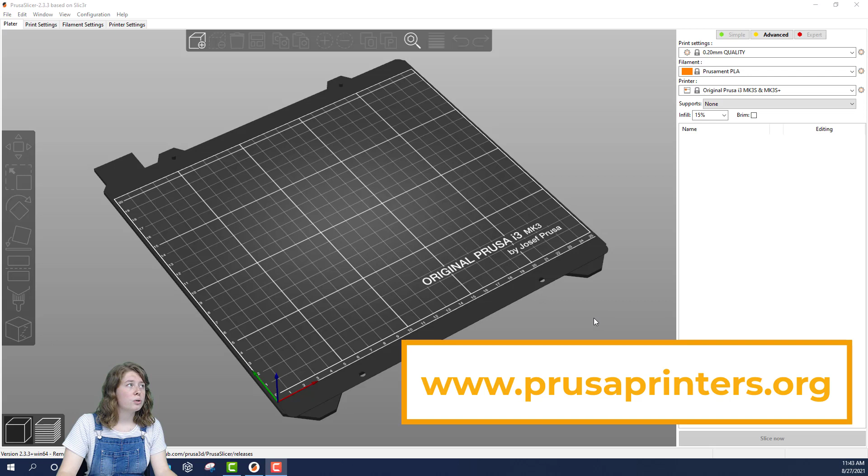If you haven't downloaded the Prusa Slicer yet, you can get it off of their website. It's listed under the tab Prusa Slicers. When you go to download this, we're specifically looking for version 2.3.3.

If you already have the slicer downloaded like we do, I'm going to take you through setting up the new printer. We're going to go over to this printer setting, select this drop-down menu, go to Add/Remove Printers, and then select Add/Remove Presets.

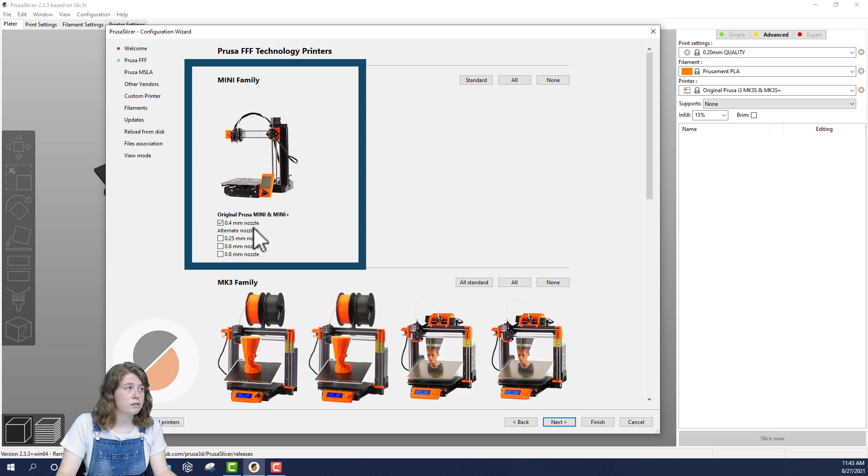From here, we want to make sure that the Mini family is selected, and we are looking for the 0.4mm nozzle. We also want to check and make sure that the original Prusa i3 MK3S is selected, also with the 0.4mm nozzle. From here, we can just hit finish and our printer will be added to the new slicer.

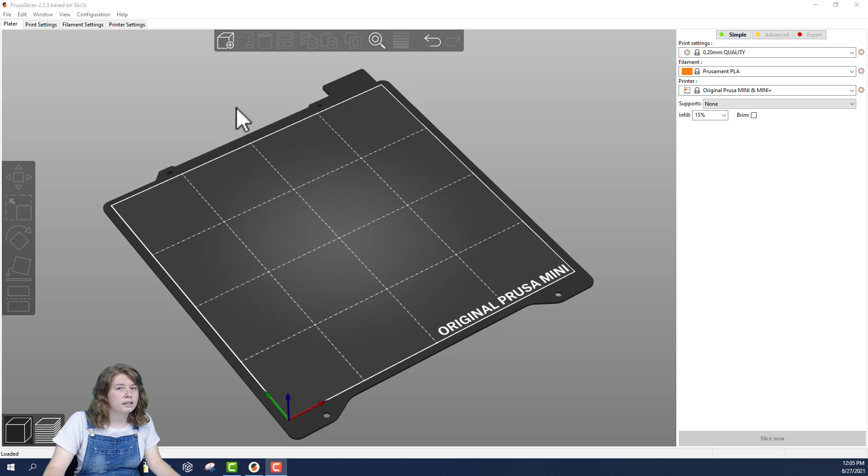Now that we have the original Prusa Mini bed imported into the slicer, we can add our project. To do that, we go up to this 3D square and select it, and you'll see your project come up. You'll select your project and hit open, and there you can see your coin automatically comes into the printer bed.

So now that we have the coin loaded into the bed, we have a lot of options for what we can do in terms of moving the coin around, scaling it, or rotating it. We'll take a look at the rotation first.

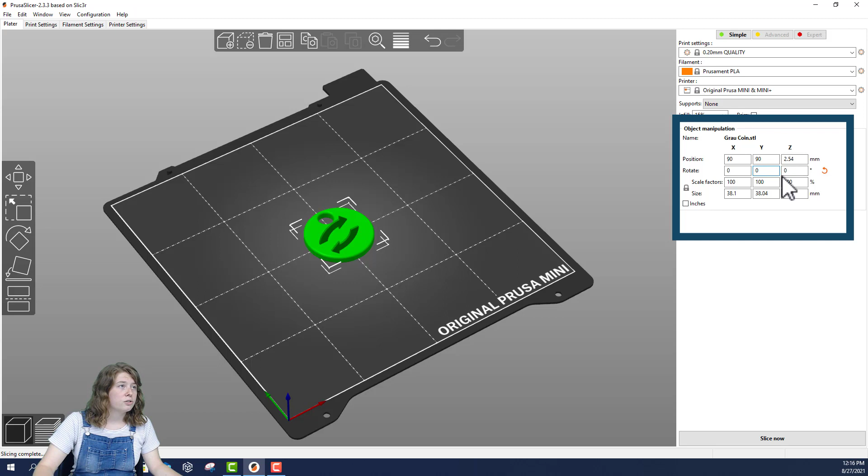If we wanted to rotate the coin, you can use these arrows and rotate it, or I think it's easier to use the settings on the right hand side. Say we wanted to flip it 180 degrees, we can do that, and then flip it back. You can also change it in the Z direction by 180, and then change it back. That's how you use the rotate tool.

We can also change the position of our coin on the bed if we wanted to. Again, we have these arrows highlighted that we can use, or we can change them over here. Say if you wanted to move it along the X axis a little bit, you can do that there, and you can also move it on the Y. Now you typically won't have any reason to move it along the Z because that'll just be up and down, and you want your print to stay on the bed.

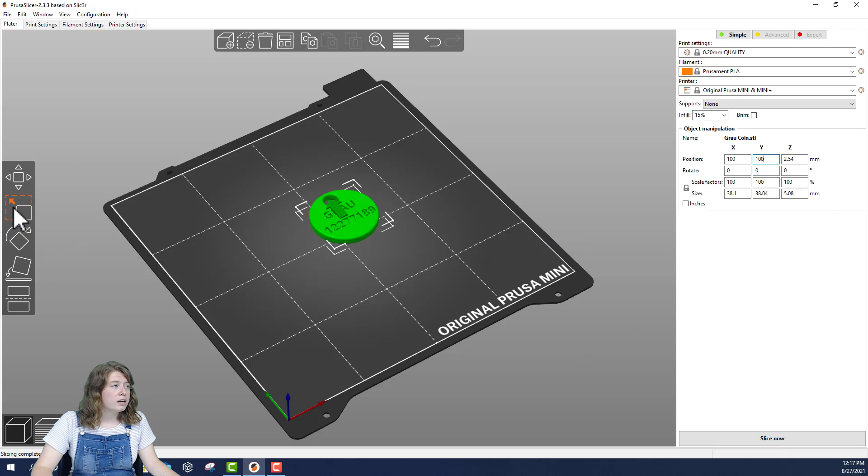Another thing that you can do here is scale your print. Sometimes you might be working in inches or millimeters, and when you bring the print into the bed, it'll look much smaller or bigger than what it's supposed to. You can change the scale factors along here.

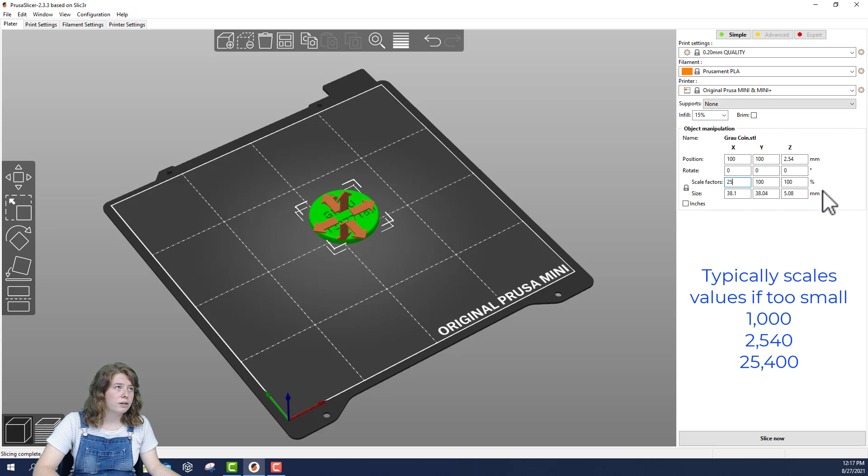Here you can see at the bottom, the scale factor for the X is 100. If I change that to 254, it's going to make it much bigger than what it was before. You can also see that it has snap scaling, so it's not just going to change in one direction, it'll change them all at the same time. We'll take that back down to 100, and our coin is back to where it needs to be.

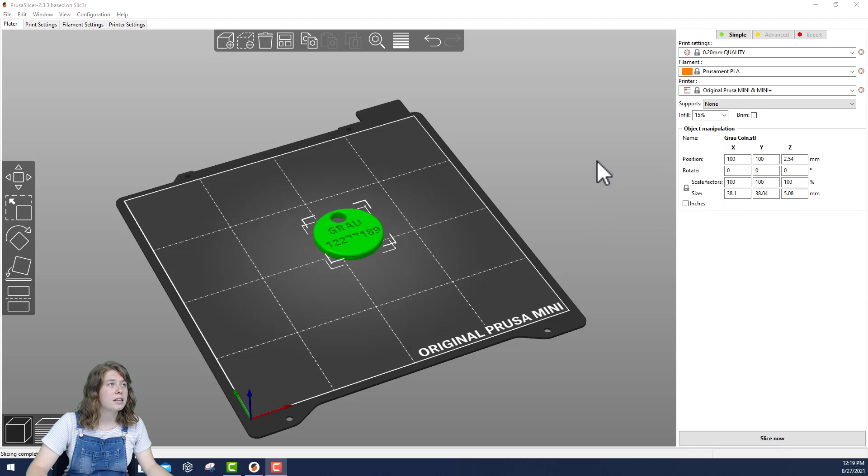So now that our coin is scaled correctly and it's in the right position on the bed, we can start looking at some of the settings on the printer. The first thing we're going to look at is the print setting. We want to do 0.20mm quality.

The next thing we want to check is the filament. Right now we have Prusament PLA selected. Any PLA will work on our printers.

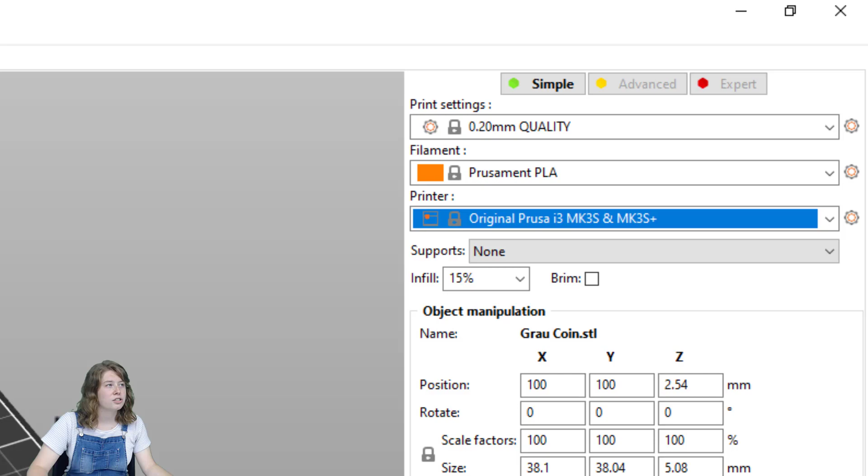We also want to check on the printer. Right now I have the original Prusa Mini selected, but if the Minis were unavailable or you needed a different printer, you can also select the i3 MK3S. In that case, it'll just switch the bed—you don't have to worry about changing any settings or anything, it's just a bigger bed. So we'll switch back to the Mini.

From here, you're ready to slice your coin. That'll be at the bottom, and it says Slice Now.

Now we can see a preview of what the printer will actually do while it's printing. If we take it through this scroll bar, we can see the different layers that the printer will add as it's going. This is a great way to check and see what the printer is actually going to do and make sure your print comes out looking how you want it to.

If you look down here at the sliced info in the bottom right corner, you can see how much filament is being used, and you can see the estimated print time. For this coin, it's going to be about 24 minutes, and that should be kind of average across the projects.

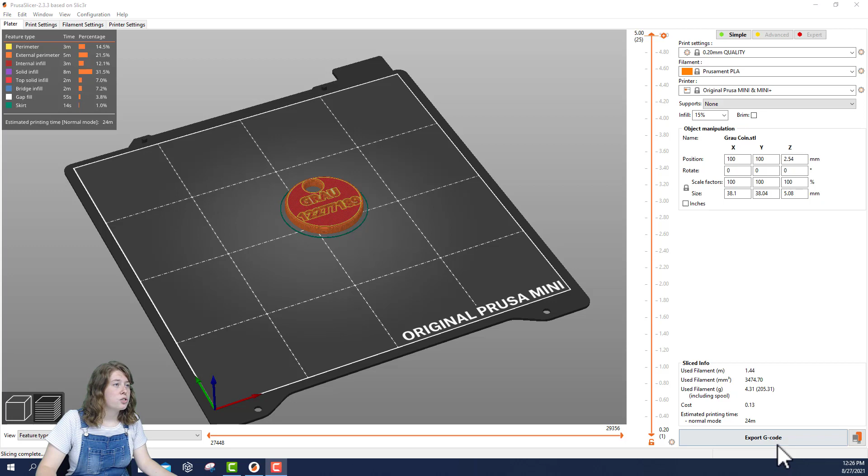So now that you've checked on how much filament your print is going to use, and you've checked on the runtime of the printer, we're ready to export the G-code. Down here you'll see export G-code, you'll select that.

You'll want to save it to a flash drive to plug into the printer. Whenever you save it, you want to make sure that you give your coin a unique name. So mine says Grau Coin. Typically you want to do your last name or just something recognizable.

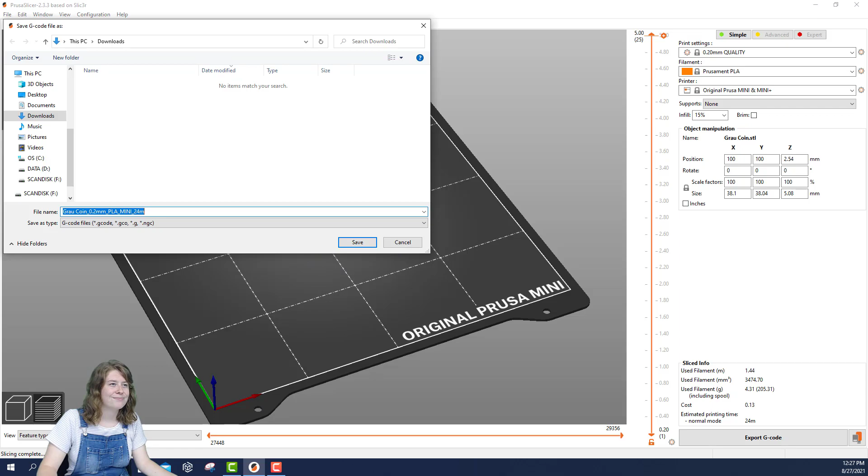And now from here, you're ready to print. Check the filament wheel to make sure that you have enough filament to complete your print. You can insert the USB drive in the back side of the Prusa Mini.

When you do, your print will pop up on the screen. You can use the scroll wheel to select your print. The bed is removable and you can gently flex it in order to release your print when it's finished.

Now the bed will heat up and the print will start.

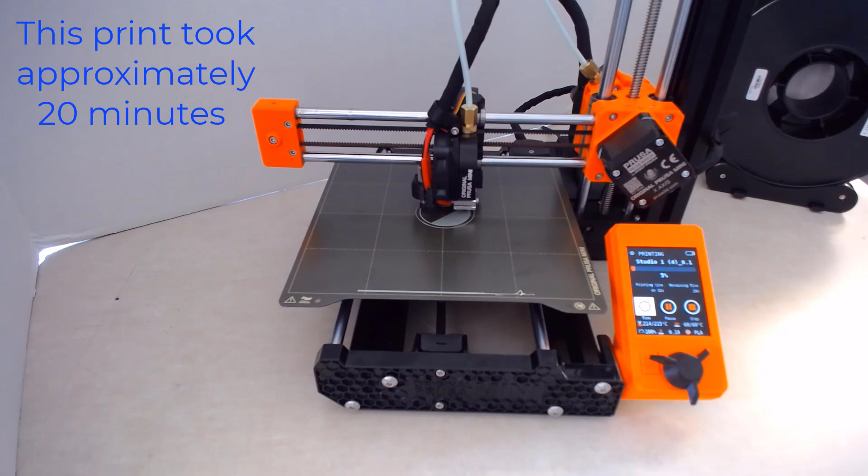Now that the print has finished, I'll gently flex the bed of the printer and remove my print. As you look at my coin, you'll notice that it's a little bit different than the ones that you all will be designing, but it still meets the design requirements laid out by the Innovation Center.